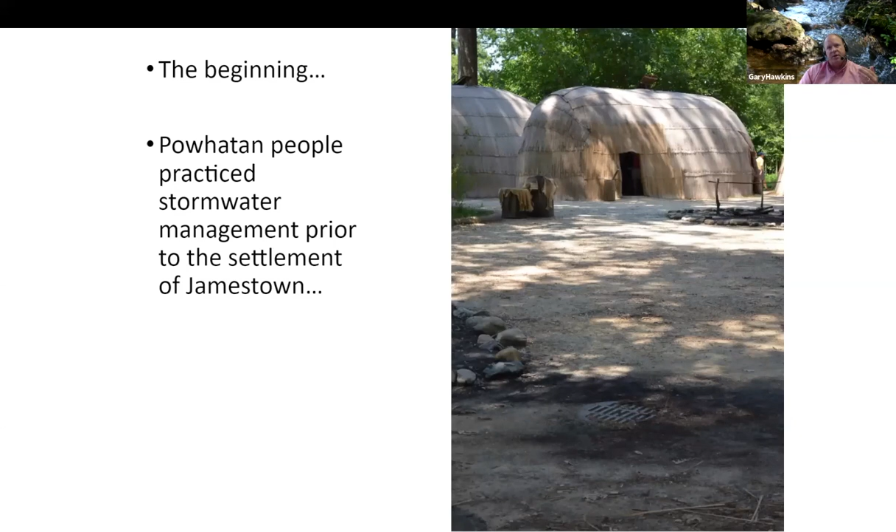So where does this stormwater exist? A couple of years ago, my family went and met some of our friends up in Virginia, and we went out to the Jamestown settlement. And as we were walking around, they have replicas of the old Native American huts and the way they cook their food and things. And I noticed the stormwater drain there. And I told my family, look here, look at the stormwater drain. They practiced this way back in the Jamestown era.

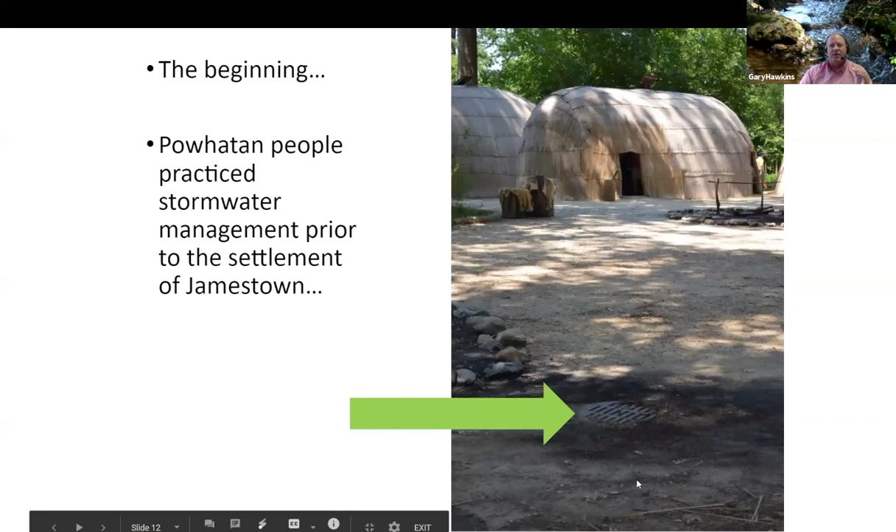And my family goes, no, you're not going to take a picture of this. But I'm just kidding, guys. This is not where stormwater started. Stormwater started a lot later than this. But it's just kind of a picture that shows even when we have water running off the land, we have to manage that stormwater.

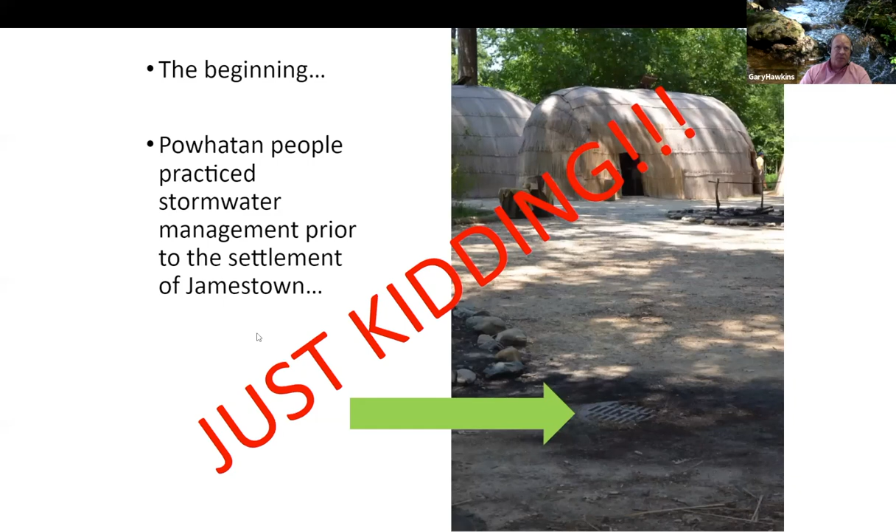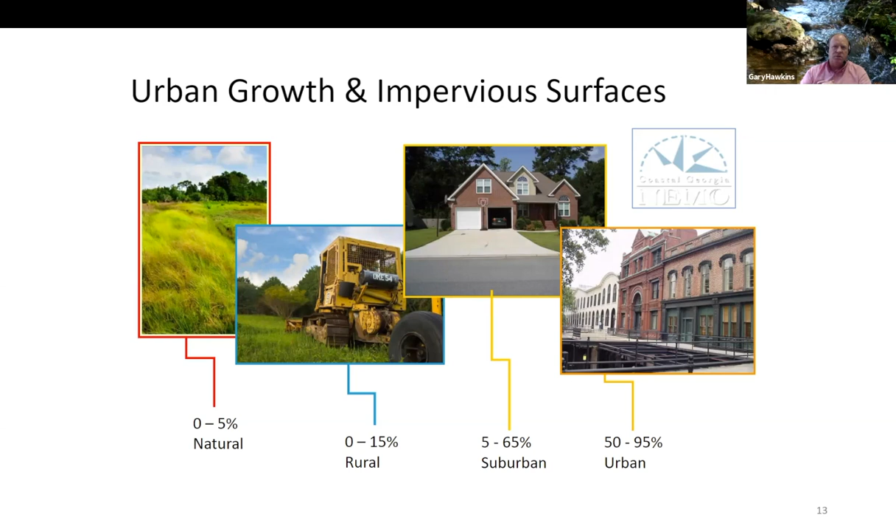When we get to a quote unquote purely urban area there on the far right, we're getting up with a lot of asphalt, a lot of concrete, a lot of buildings. And as you see, we can get upwards to 95% impervious surface.

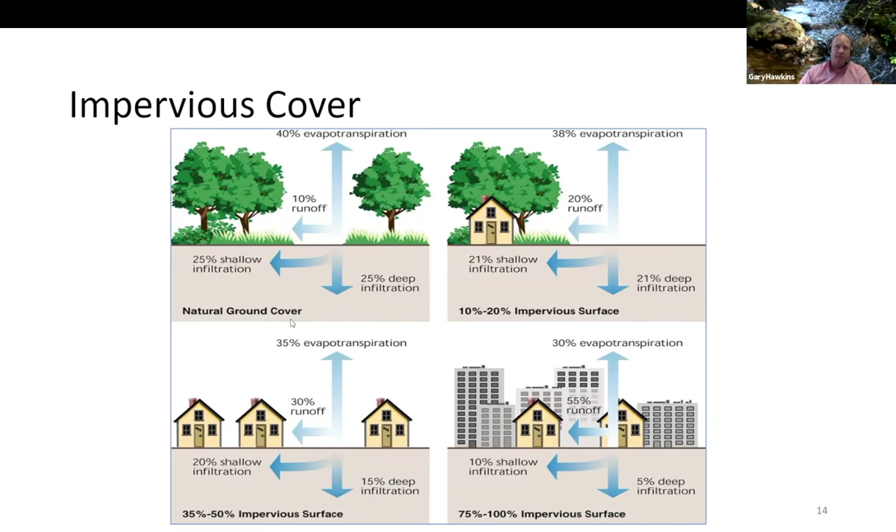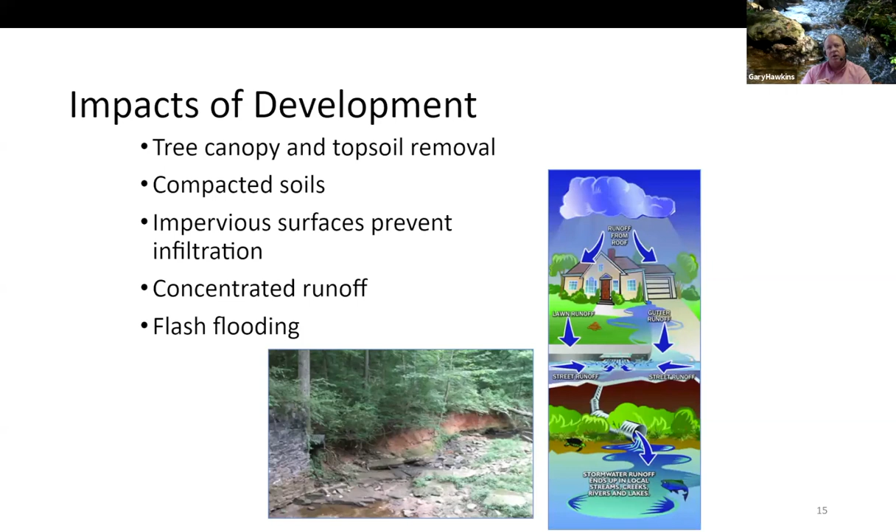If we get enough flooding, if it's been a lot of rain prior to the day that it rains, I know when I watch the news out of Atlanta, especially if it's rained for 2 or 3 days, they say there's a possibility of those flash flooding events, and that's why: the ground is saturated. The water can't go in faster than it's coming down, and it runs off. And then that picture there in the bottom middle is an indication this stream has gotten a lot of flash floods, a lot of high water coming down it, and you see the erosion occurring there.

So why then do we want to manage stormwater, and why do we want to start looking at green infrastructure? Alan mentioned it a little bit. We want to cut down on the sediment. We want to cut down on the pathogens. We want to cut down on the pollutants moving into our creeks, rivers, and streams. But one of the other things we want to do is we want to mimic that natural hydrology.

So we want as much of that water to go into the ground surface. We want it to go in so, like I said earlier, it infiltrates and it can help feed that base flow into our creeks and rivers around the Atlanta area, around the suburbs of Atlanta. It also reduces the pollutants entering those local waterways. So these are the nutrients, the fertilizer we put out, the sediment, that's the soil from construction sites, from our yards, and the other pollutants that may be out there.

I mean, how many times have you ridden down the road and seen cups and paper bags and grocery bags and things laying in the roadway? When it rains, those things go down the stormwater drain and get into the creeks and rivers. So those pollutants, some of the other things that I talk a lot about when I talk with groups is grass clippings. So if you put your grass clippings on the street side of the curb, when it rains, those grass clippings, leaves or whatnot, get into that stormwater drain as well.

When we look at green infrastructure, like I said earlier, it increases that infiltration. So we want to get water into the ground again, so we have to use less irrigation water, but also to mimic that natural hydrology of getting that water in the ground. On the previous slide, we talked about protecting creeks, streams, and rivers from flooding. So again, the less water we have run off the surface, the less we have to transmit to those creeks and river systems. And the creeks and rivers then can do their job of moving the water that's naturally there off of and away from the land surface without having this extra water from impervious surfaces.

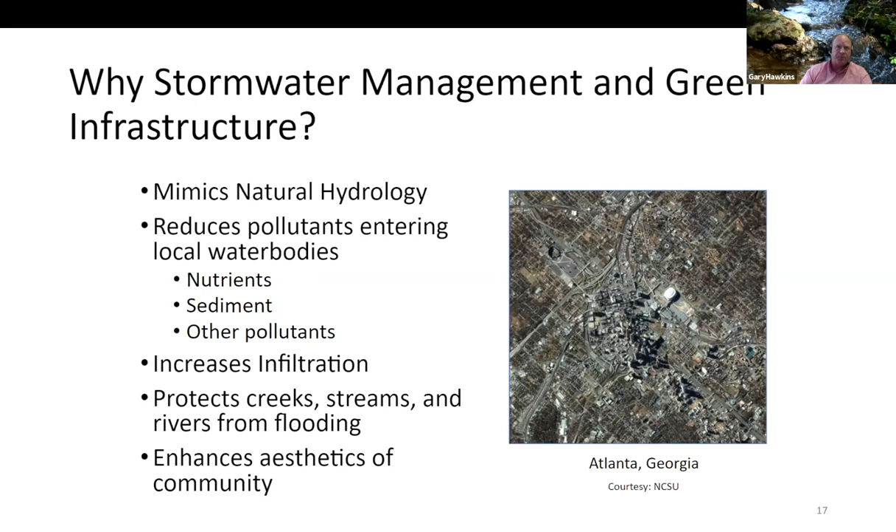And then, as you'll see with the rain gardens and some of those pictures that Martin will show and then Rolando will show in a little bit, it enhances the aesthetics of our communities. So today, Martin's going to go through, actually, 5 different practices that Katie talked about through the GCAP program. One of those will be rain gardens. So Martin will explain a lot about what rain gardens are, where we can put them, how we use them, and such as that.

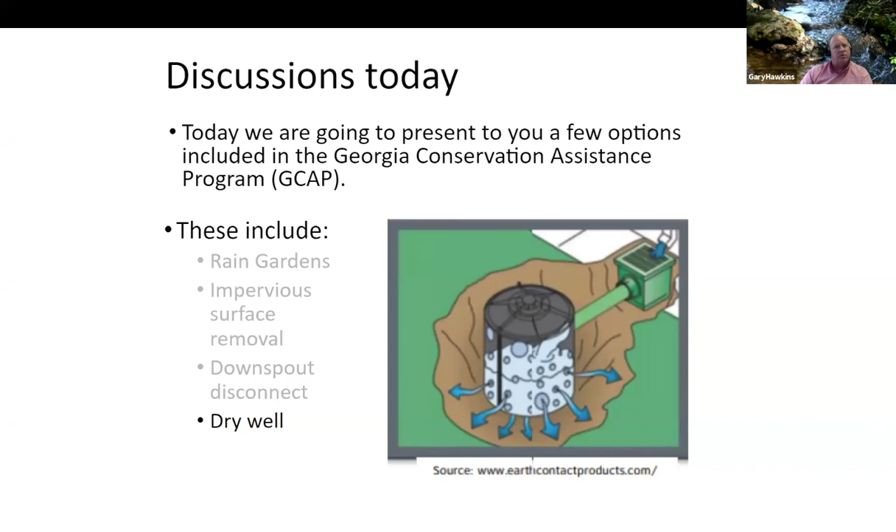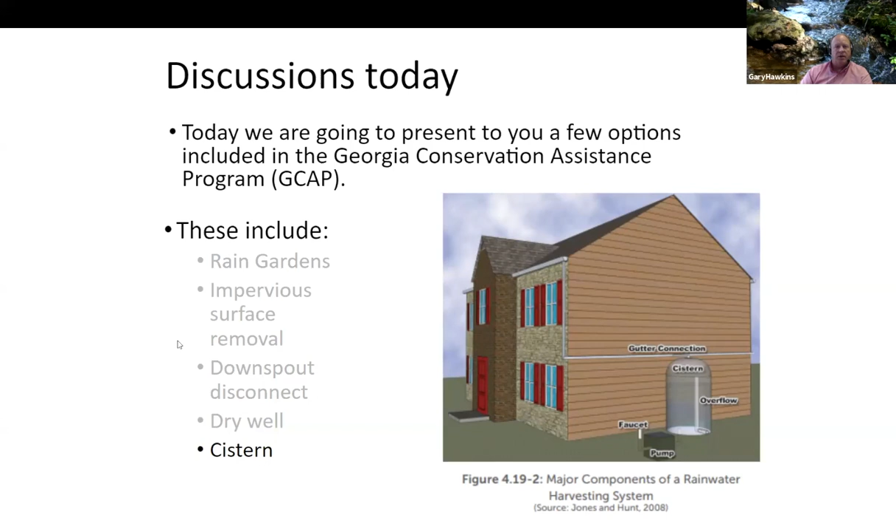Downspout disconnect, as you see in the pictures here, we remove that downspout from going into the stormwater drain and let that water move out onto the soil surface. Dry wells are another way to take care of that water. Again, it's really just getting that water into the subsurface and infiltrating it versus going into our stormwater drains. And then cisterns, rain barrels, big cisterns. And again, we'll talk about that. And then Rolando will talk about how we can use some of that water.

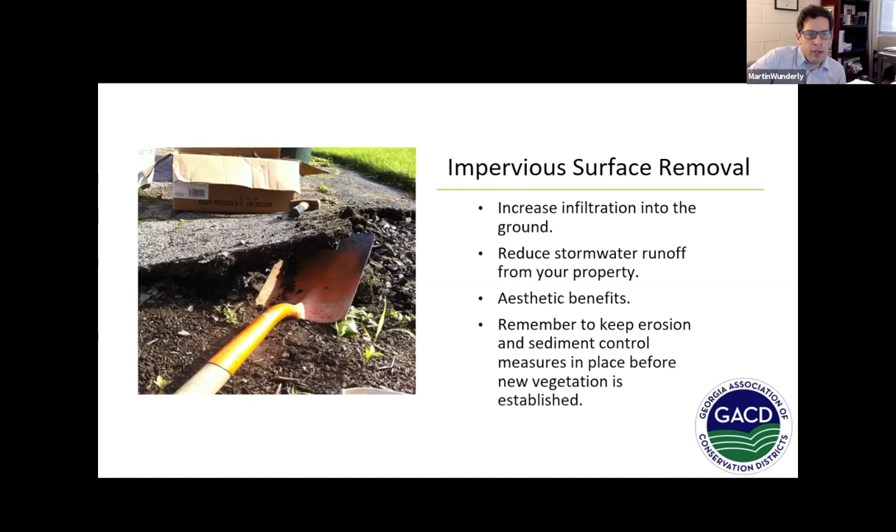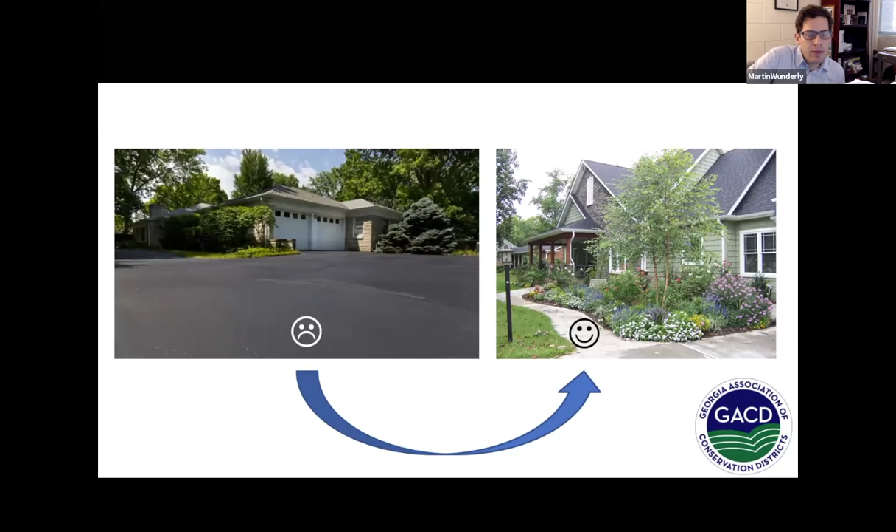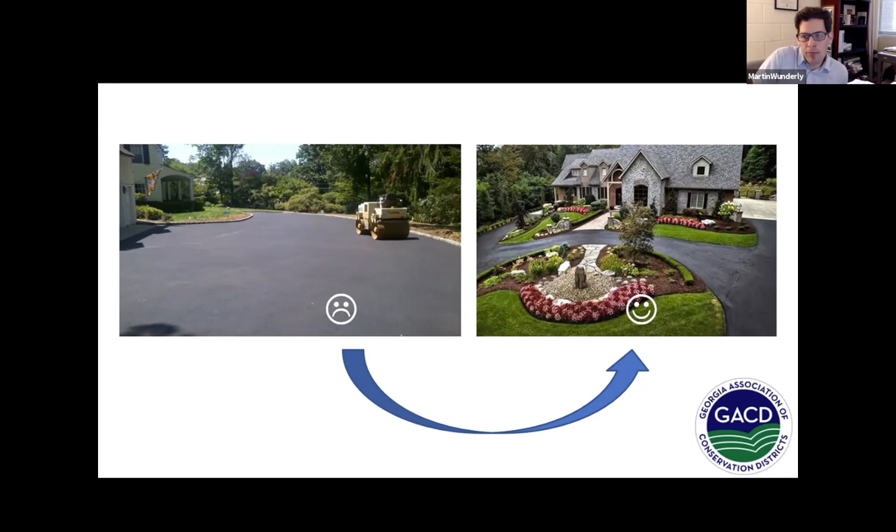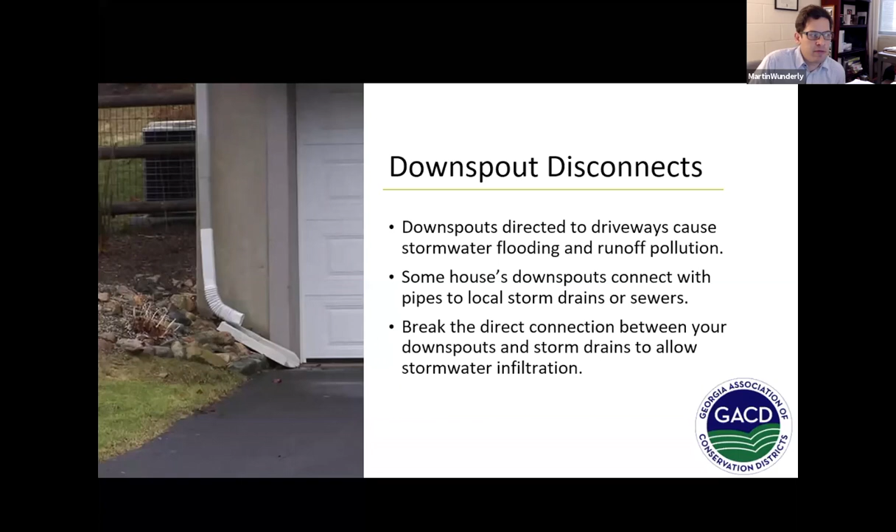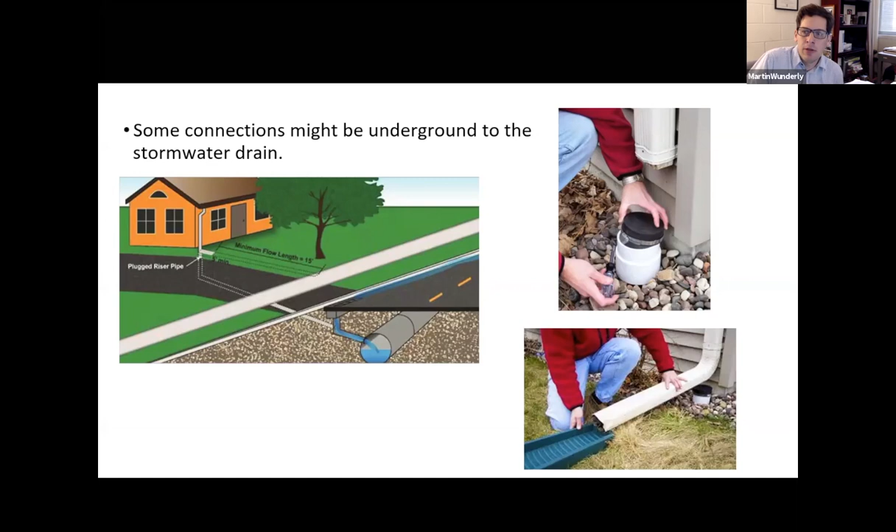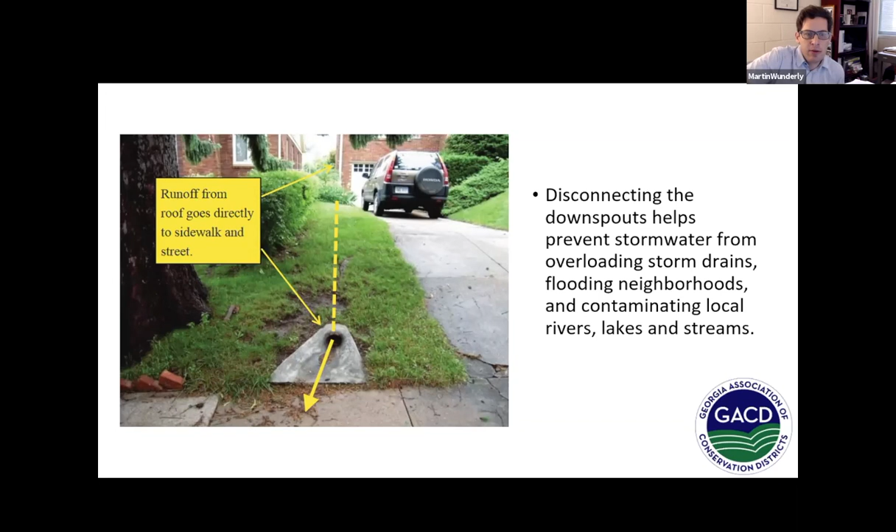This photo is another example of a downspout that is directly impacting stormwater runoff. It just opens up onto the sidewalk, traveling through a pipe under the lawn. So we want to disconnect these downspouts and help prevent stormwater from overloading our storm drains, flooding neighborhoods, and contaminating local rivers, lakes, and streams.

Now, this is where we would prefer that we send our stormwater runoff off of our roof through an extended downspout into a landscaped area for infiltration into the ground. You can also divert this stormwater into another green infrastructure practice, such as a dry well or a cistern or a rain garden. So we're connecting some of these practices.

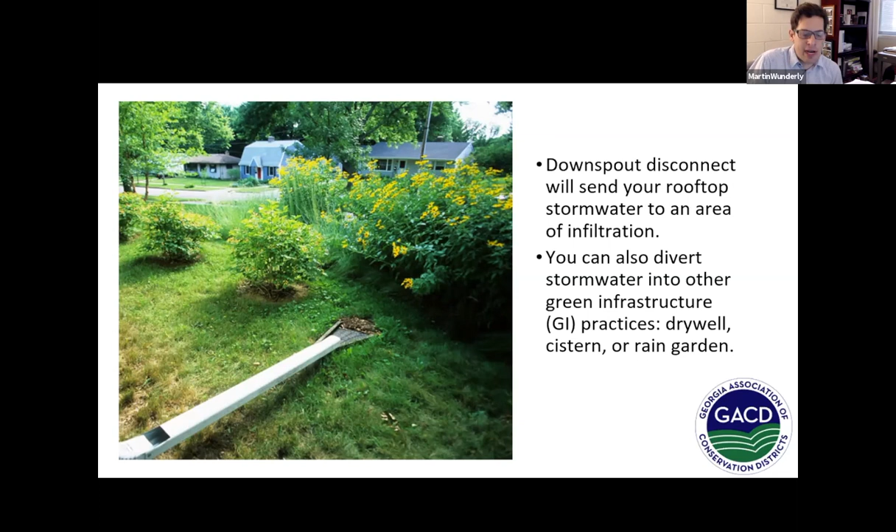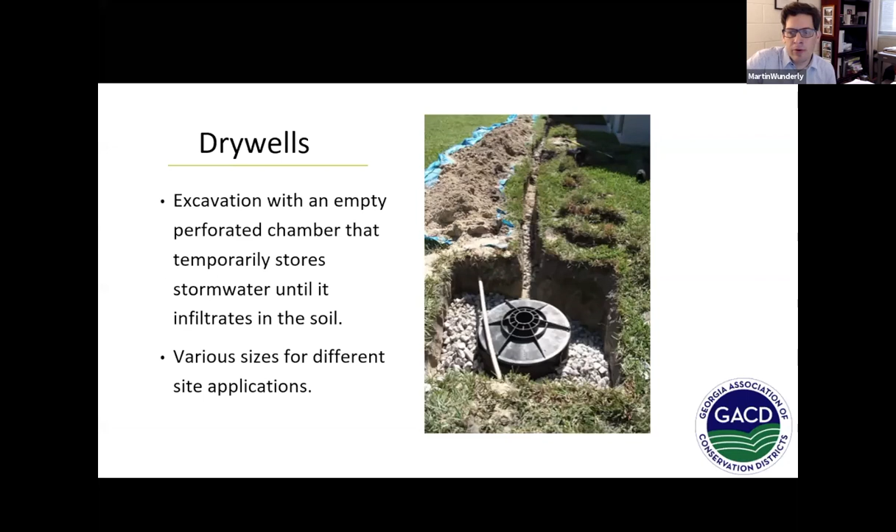Now, first of all, dry wells, they're basically an excavation in the ground with an empty perforated chamber in it that temporarily stores stormwater until it infiltrates into the soil below. You can see in this picture that final product, they'll recover that with soil and earth and landscaping. But that will be connected to probably a downspout as you go further up that little channel that was dug into the ground, with a direct connection to that dry well to collect stormwater. You can have different sizes for different applications here. And dry wells can be directly connected to your downspout.

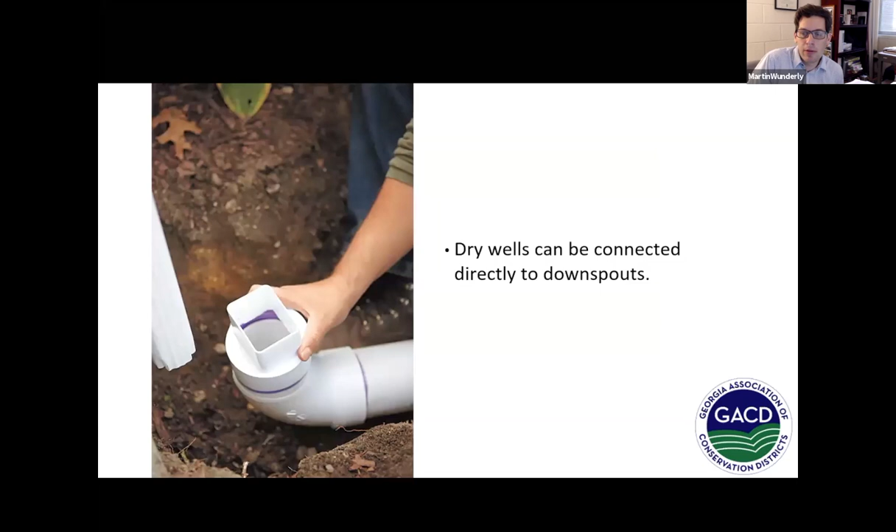You can collect runoff from parking areas as well. You can direct that into your dry well. Just remember that we do not want to put the dry well under an impervious surface in case you need to work on it. And we want that to be at least 2 feet above a water table underneath your dry well. You do not want to put these over utility lines or above a septic field.

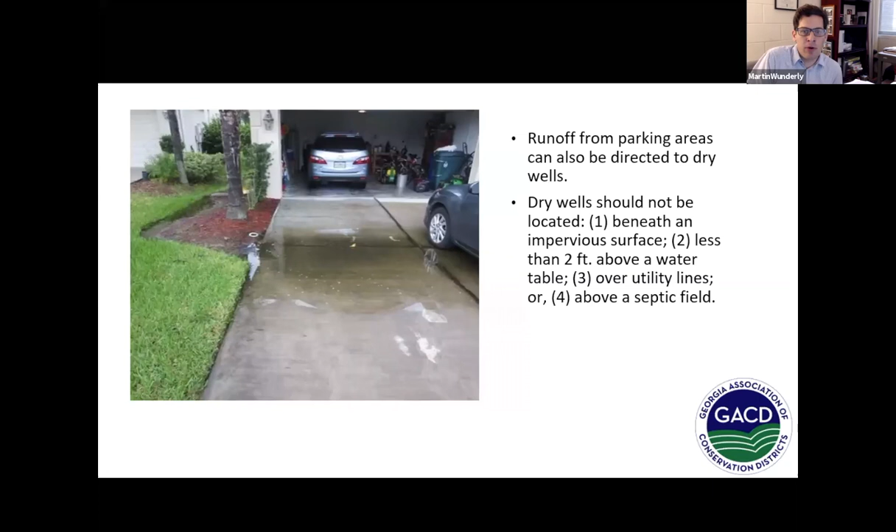But this photo shows an area that probably could use a dry well to the left in the landscaped area where it can collect this stormwater. Now, cisterns are a little bit different. They're just usually above ground, and what they're doing is harvesting rainwater for another use. Instead of infiltrating it into the ground, we're collecting it in some type of containment system.

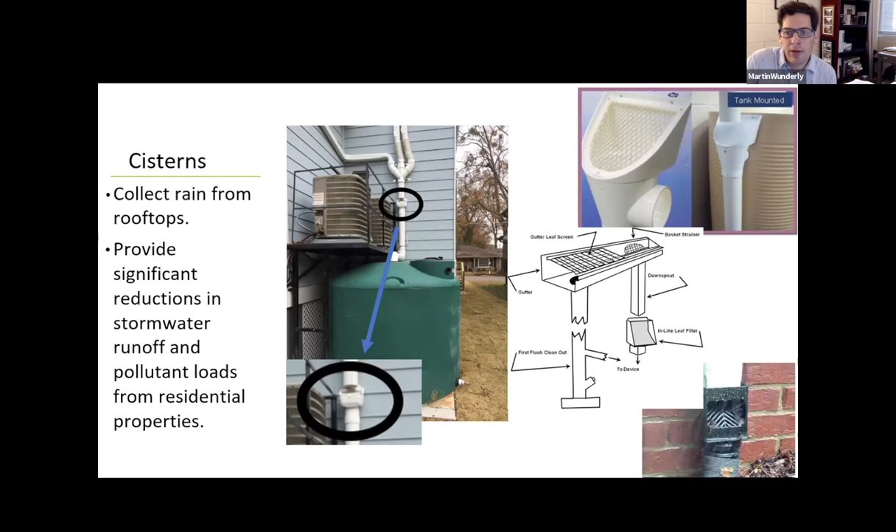You see a few screens on this slide here that are just meant to keep leaves and sticks and other debris from entering your rainwater collection cistern. And I think Dr. Hawkins will explain a few other pieces of engineering that will help prevent contaminating your rainwater source. So these cisterns can be different sizes.

and think about where you might intend to use this harvested stormwater when you choose a location, say you have a flower bed that you need to water regularly. You want to avoid utility conflicts, electrical connections. If you need to pump the water out for your irrigation, you might need to consider where your electricity supply is. And you don't want to block a window that's used for emergency exit from your building.

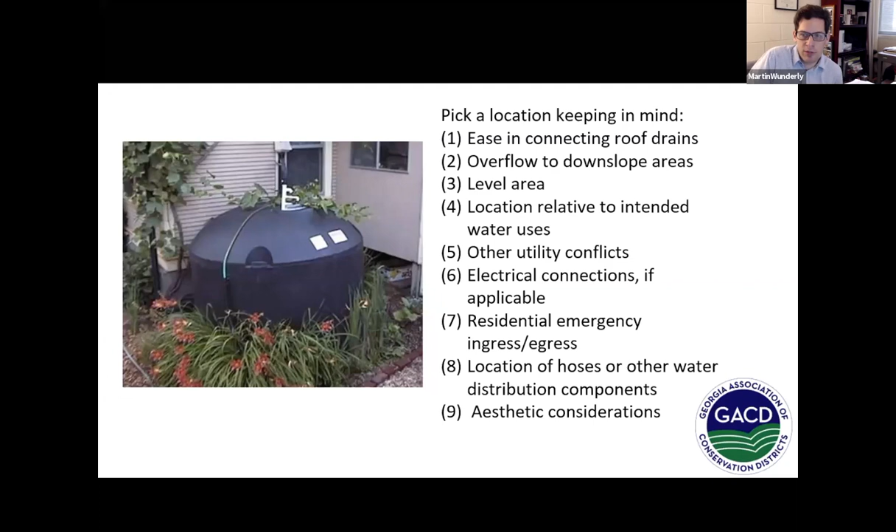And think about location of hoses and other distribution parts for your irrigation system. And think about where it just might look nice for aesthetic considerations. And I think I'm going to hand it back over to Dr. Hawkins here to talk about maintenance.

Thanks, Martin. Let's see if I can get the screen here. So Martin went through the 5 practices that the GCAP program will cover. So what I want to do is just go through a little bit of the maintenance side of it. And again, Katie mentioned earlier that GCAP doesn't pay for the maintenance, but once you get one of these practices installed, or if you have one installed, here's some of the maintenance ideas that you need to think of. Now, I'm not saying this is an extensive list, but these are some of the things that should be considered when you start looking at these practices.

Next thing is make sure you keep healthy plants in there. So the plants do a couple different things for us in rain gardens. One, they look nice. They attract the pollinators. But what they also do is they evapotranspirate. They move a lot of that water back into the atmosphere for us. So keeping a healthy plant population in there gets a lot of that water back into the atmosphere for us.

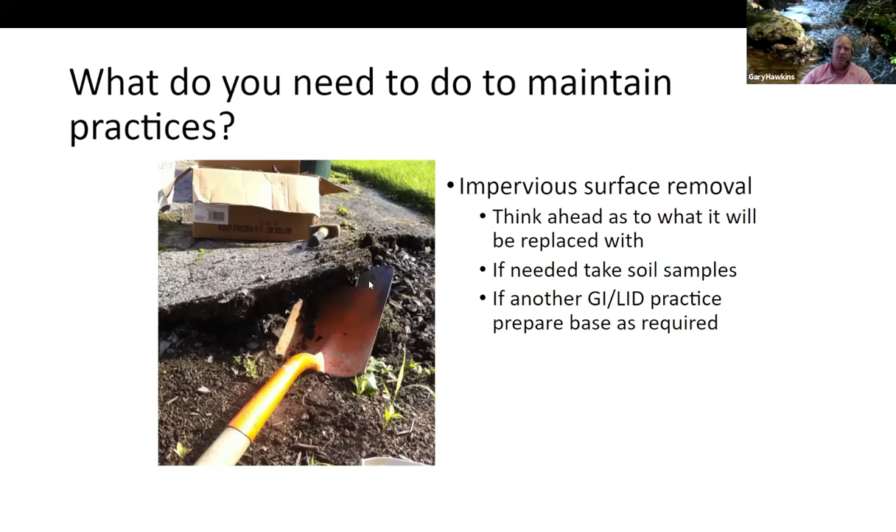When I was talking about downspout disconnects, then again, Martin mentioned how we can get that water to rain gardens or other GI LID practices, but we need to look at how do we reduce the water from flowing onto those really highly erodible spots. So if you disconnect that downspout, don't let that water go out onto a bare area. That bare area, with the velocity of the water coming through that downspout, can erode that soil away. So just kind of be mindful of where that downspout goes to.

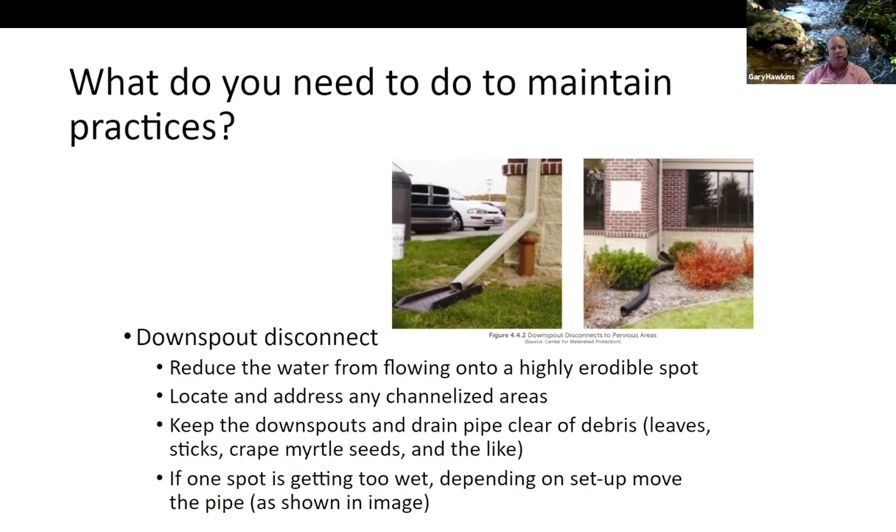One thing you need to look at and think about then too is locate and address any channelized areas. So if we start to get a lot of water coming off of the roof areas and start to see channelization, again, move that downspout if possible, but then really address those channelized areas, because if we get them before they really get deep, then we can maintain them a little bit better.

With dry wells, as Martin said, a lot of the water will go in here. And I noticed in the chat that one of the things that Corey mentioned was the dry wells receive that first inch of water. They don't really take up a lot of the bigger storms, but those things are designed to take up just a certain amount of water coming off of that roof. But if we fill up that dry well with leaf litter, with other debris, then it can't handle that volume that it's designed to do.

So keeping that leaf litter out, and I'll show a first flush diverter here in a minute. And Martin mentioned the leaf guard or the inline leaf filters. And what those things do is they keep those leaves, those crape myrtle seeds and things out of the dry well or the cistern, and let mainly just water go into those systems.

You need to watch the level in these dry wells as well. Just like the rain gardens, if we get a lot of sediment for some reason building up in the bottom, and the way these dry wells work is you get exfiltration, or you get movement of water out of these containers into the surrounding soil and the soil below it.

If we get a lot of sediment in there, it can actually blind the system, so it can't hold as much water as it was designed to. So just keep a watch on that level. Again, if we know it's supposed to move the water out in a certain amount of time, and you have one that's holding water longer than that specified amount of time, that's something we need to look at as to why it's not moving that water out. And again, keep those first flush diverters clean and maintained to keep relatively clean water going into these systems.

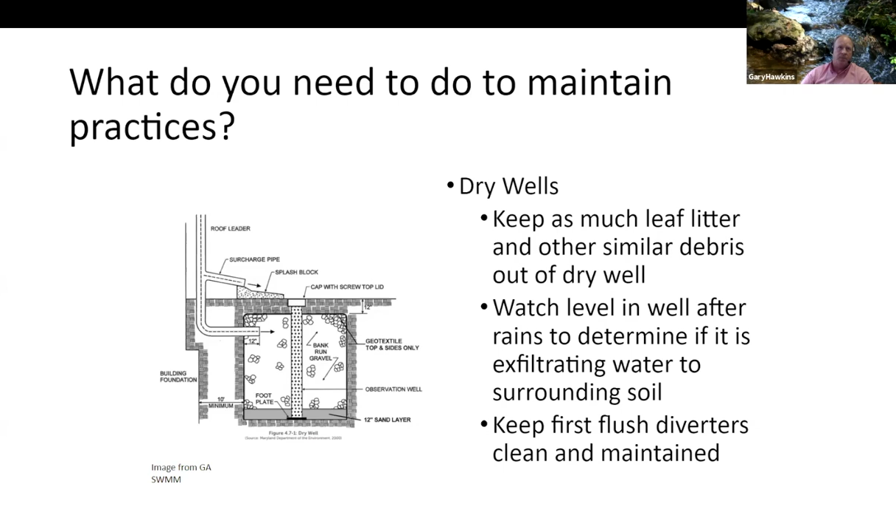Once it fills up, that floating ball will actually blind off that water, and then all the water thereafter will go into the outlet, whether that's a cistern, a rain garden, or another form of whatever. And then every once in a while, you need to drain or open that hose bib or take that clean out plug out just to get all that debris out of the system.

Martin showed a picture of the inline leaf filter, the same thing. Make sure that leaf filter is clean. The way it works is the leaf litter will go on that screen and go off and away from the house or away from the downspout where the water will go through, but just make sure it's clean and not being blinded.

With the cisterns as well, the biggest thing you need to do is look at having a dark tank. The pictures that Martin showed were a green tank and a black tank. You definitely don't want a tank where light can get into it. The lighter tanks, the translucent tanks, the clear tanks will allow algae to grow faster than a dark tank. Typically in the dark tanks, you don't have very much, if any, algae growing, which can cause problems within the tank with some of the stuff Rolando will talk about. So having a dark tank is preferable.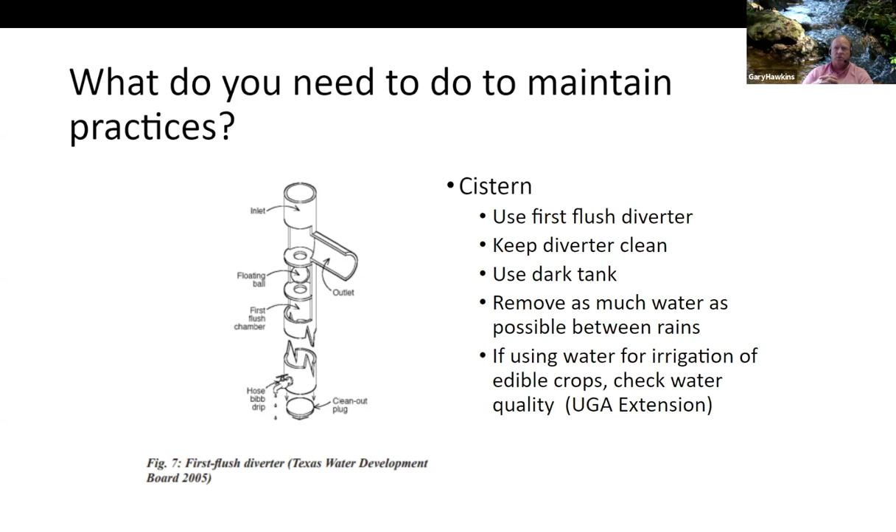Between rain events, you need to remove as much of that water as possible, because the cisterns are designed to hold a specific amount of water. If you don't get that water out between rain events, then obviously it can't hold any more water. So that's one of the big maintenance issues with cisterns, getting that water out. And if you need to use it for irrigation, make sure it's not on edible crops. If it is, you really need to check that water quality. I know Rolando is going to talk a lot more about water quality in the next couple of slides. So with that, Rolando, I'll turn it over to you.

Thank you, Gary. As Dr. Hawkins mentioned, my name is Rolando. I work for the Center for Urban Ag in Griffin, and we will talk today about alternative uses of the water that is being captured and the different cisterns and rain garden water uses.

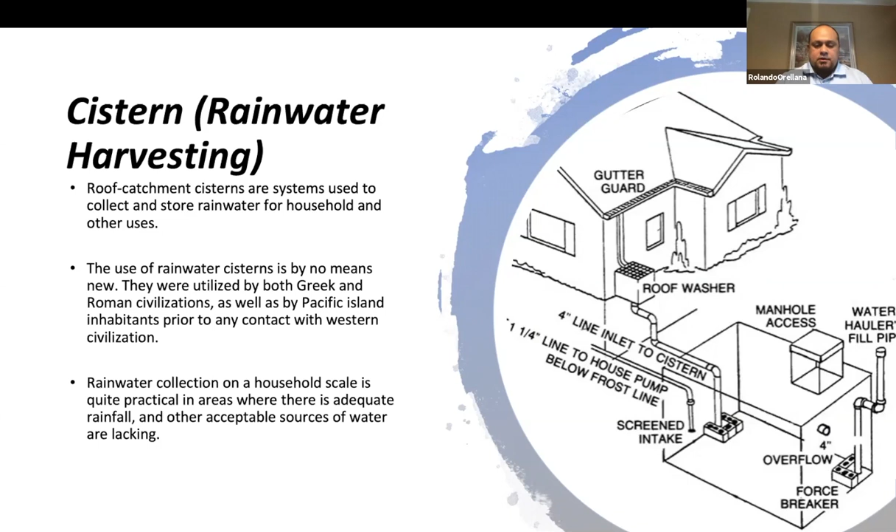It is very practical in areas where we have a good precipitation average. In some areas, it's probably not very practical because they don't have a good average. But locally here in Cobb County and Fulton County, there is a distribution supply, and it's very efficient, and it is available to residents of the two counties.

And in the state of Georgia, the water in Atlanta, the metro city, is considered one of the most expensive waters there is in the state. So Cobb County is a little more affordable, but it's still somewhat expensive, if that serves as some kind of joke.

But so what is the use that we're going to use? We have already these systems, and if you guys were working with the GCAP program to make some improvements, if some of those improvements will be to install cisterns or these water tanks to capture that water, there are a few uses you can have. Obviously, it has to be a non-potable usage for irrigation and other uses that

aren't intended for human consumption. Obviously, those large tanks, we have to know how big they are, how much water those tanks will hold, where are they located, and then so it can be utilized either for lawn, ornamentals and tree irrigation, or even raised beds for gardens use, etc.

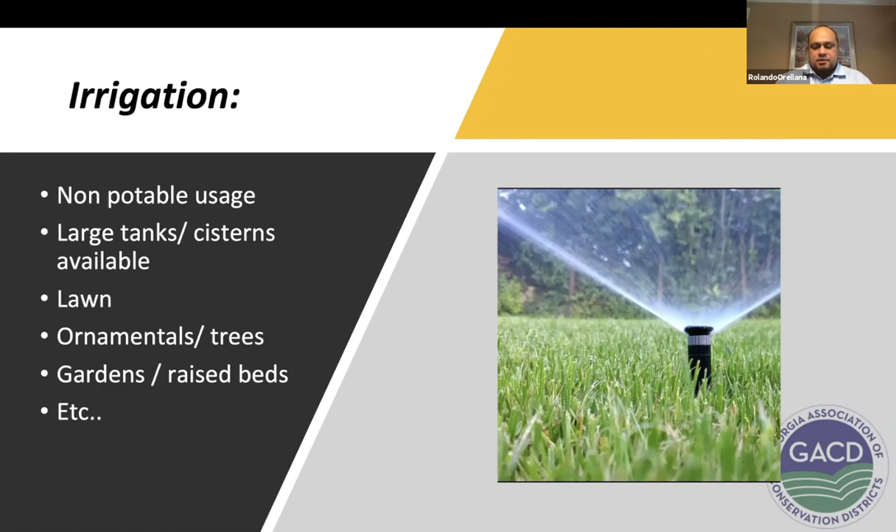This got stuck here. So one of the things that we need to understand, the tank needs to be located in the area where we're going to be using it. It has to have enough capacity so it can hold enough water to water the area or the plants or the trees or the raised bed that we're gonna be watering.

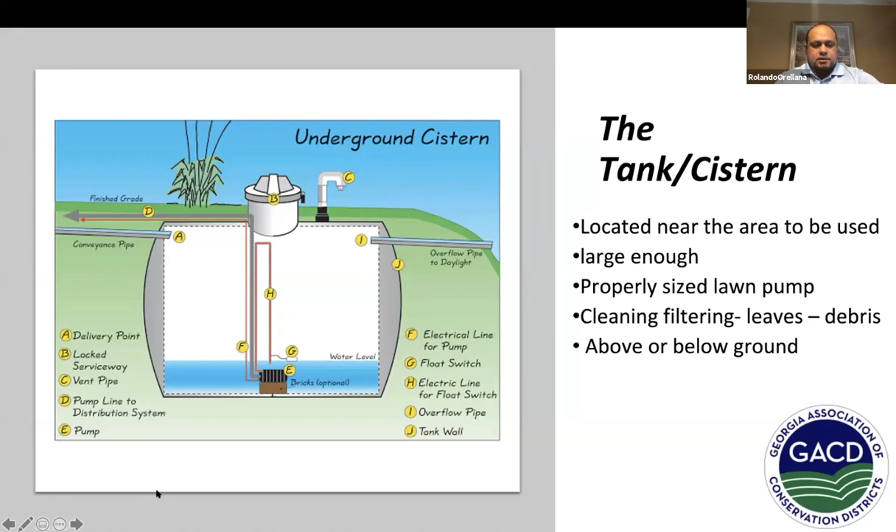Obviously, you need to have a pump that will be capable of providing the pressures needed for the irrigation system that you plan to implement in the area. Obviously, those pumps have cleaning, filtering of leaves and debris before that water can be utilized, because otherwise it might not give you the pressure that you need.

Obviously, if we have one of those tanks, we need to understand how much lawn we are intending to irrigate. Most lawns, or the average lawns, I will say, go from 1,000 square feet to 3,000 in the front yard, and even more in backyards. So you will need a lot of water for that. So you probably need to decide what area you want to be watering. So probably you start with a good measure, 1,000, 2,000, 3,000 square feet.

Obviously, the lawn or the type of grass you're going to be using has specific water requirements. We have so many different types of grasses available right now. So even though some of them might look similar on the water requirements, some types of grasses require less water, and that will be very helpful for the system you want to install for water conservation purposes.

Obviously, the type of soil we have here in Georgia, very much red clay, which is bad for water infiltration. And the terrain, how many slopes you have, that's going to cause a lot of water runoff. So those are the things that we need to consider when we will be installing or utilizing this water. Amendments, that includes maybe incorporation of some organic matter, can be done before we start using this type of system, so we can have some water conservation.

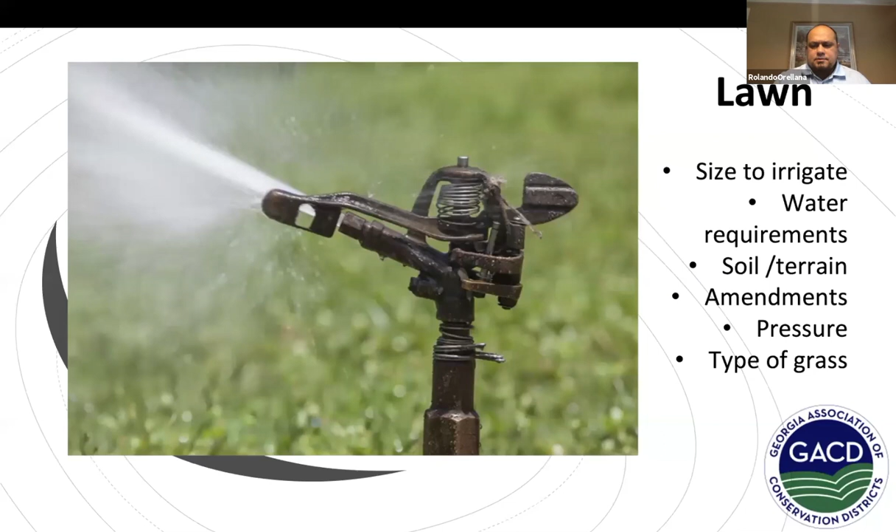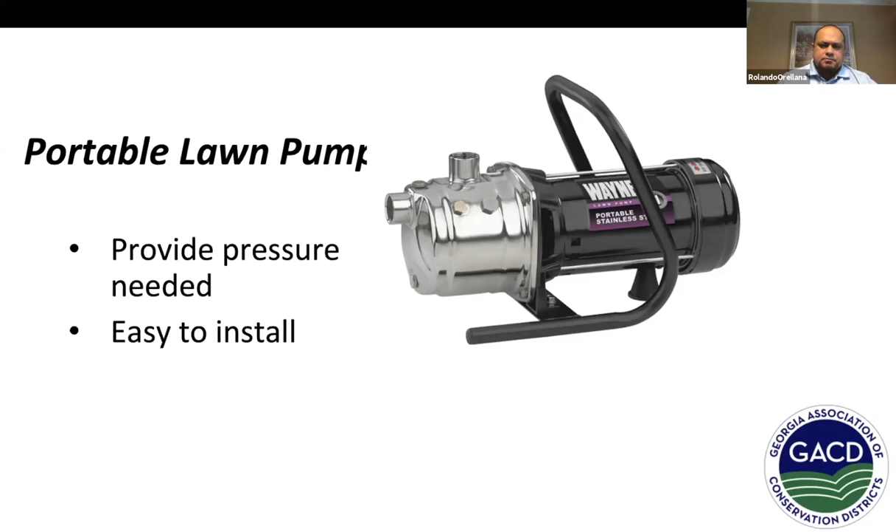Just quickly, I wanted to talk a little bit about the grass that a UGA engineer released a few years ago. I don't know if you've been familiar with this, but this is TifTuf. TifTuf has been tested in around 19 drought stress trials to sport fields.

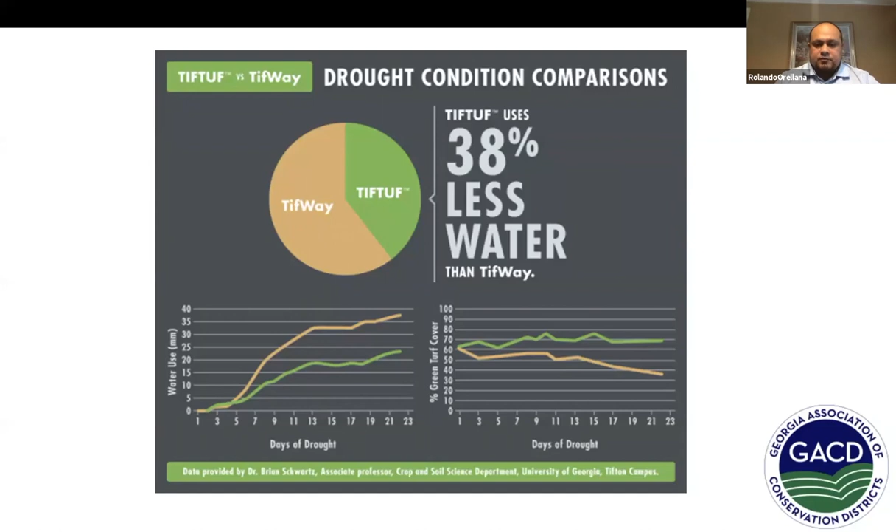So different universities tried these things, and they found out that it saves around 38% of water compared with Tifway. So I think this is a good option for somebody who wants to be implementing. So, 38% less water compared to Tifway. So this is a pretty good option for somebody who wants to implement some of these practices.

When we're talking about irrigation on trees and ornamentals, obviously we're not going to be using the sprinkler systems. We're going to be using the drip system, which doesn't need a lot of pressure, and obviously will need some type of maintenance. The initial cost of this is going to depend on how much or what quality you want to add to the system, but it will definitely cost some initially.

It is most effective because you're going to be delivering the water where it is needed. Obviously, you want to be minimizing the loss of water by evapotranspiration, which is one of the problems that we have, and obviously by runoff. Mulch provides this layer so you can conserve some moisture and not lose some of that water by ET.

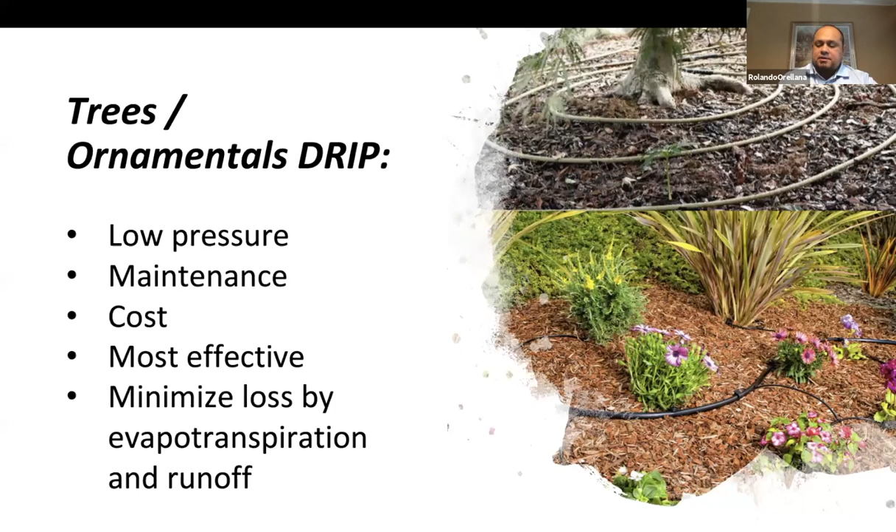But drip irrigation systems will be very ideal for trees, especially for trees that need to be established within the first 90 to 150 days. It is critical to have the water that they need to be able to establish. Same thing with ornamentals. That's one of the critical parts. Most of those plants die in the first stages of their establishment because they have lack of water or excessive water.

Use of this water on raised beds or gardens. This is very important to consider: this water quality needs to be tested to be able to use it on raised beds for vegetables and for human consumption. So one of the things that you need to do is reach out to your local extension agents to help you decide what type of testing you will do at the UGA water lab.

And these are some of the publications you can get at the College of Agricultural and Environmental Sciences website. There's a number of publications. There's hundreds of publications over there. And one of the faculty available over there will be Uttam Saha and some others that will be able to help you. Obviously, to get to them, you need to be contacting your local extension office.

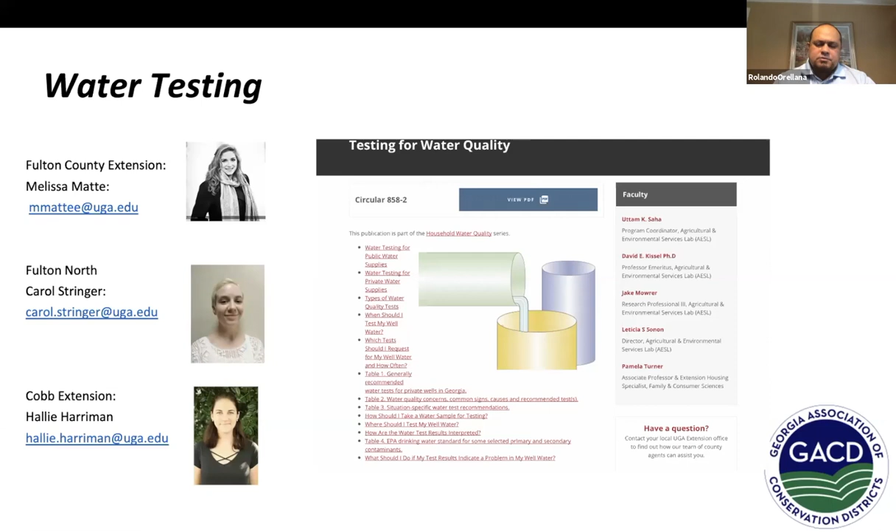You can see Melissa Matte in Fulton County South. North Fulton will be Carol Stringer, and Hallie Harriman in Cobb County. So they will be your local point of contact, so you can get access to this water testing. And they will explain more to you about the gardening part and also the water testing.

Just to talk a little bit about rain gardens, obviously all the plants that will be planted in some of these rain gardens will need water to establish. We need to get them established and make sure we have enough water. Sometimes these plants will need some water when there's deficits or drought, depending on the year. Now weather is so unpredictable; sometimes we get so much water, and sometimes we have some deficit. So it varies very often.

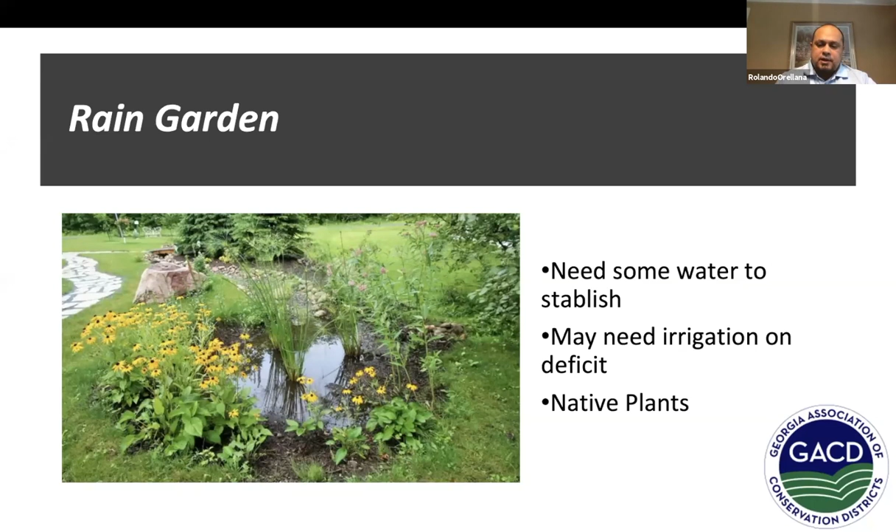Obviously, native plants most of the time will be very tough on drought resistance, but most of the time native plants also need to be good on flood or too much water tolerance, because a lot of those rain gardens get water standing around waiting for the infiltration. So they might need to be plants that will be tolerant to that.

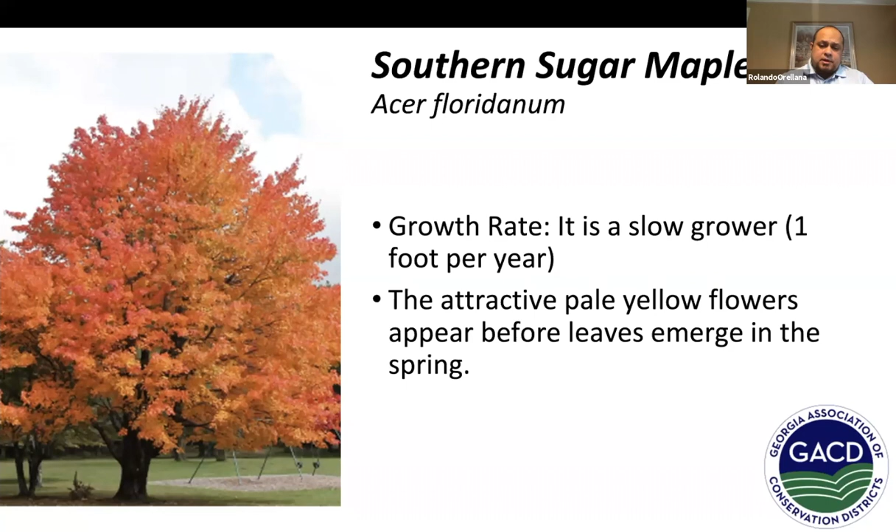Just a quick overview of some of the plants that might be available for this type of rain garden. I wanted to put this tree over there. Trees are very beautiful, with different, good colors, and they enhance the view of the landscape, yards and residential areas. So this is the Southern Sugar Maple. It is available and is recommended according to the City of Atlanta list that you will find in the GCAP manual. It's very attractive. You can see how beautiful it looks. So it might be a good option.

Then you have the Southern Wax Myrtle. It's a tough, fast-growing evergreen. This shrub is covered in beautiful dusty blue berries in the autumn. It tolerates a variety of soils from sand to clay. It grows in areas with low fertility. So that will be a good quality you might need.

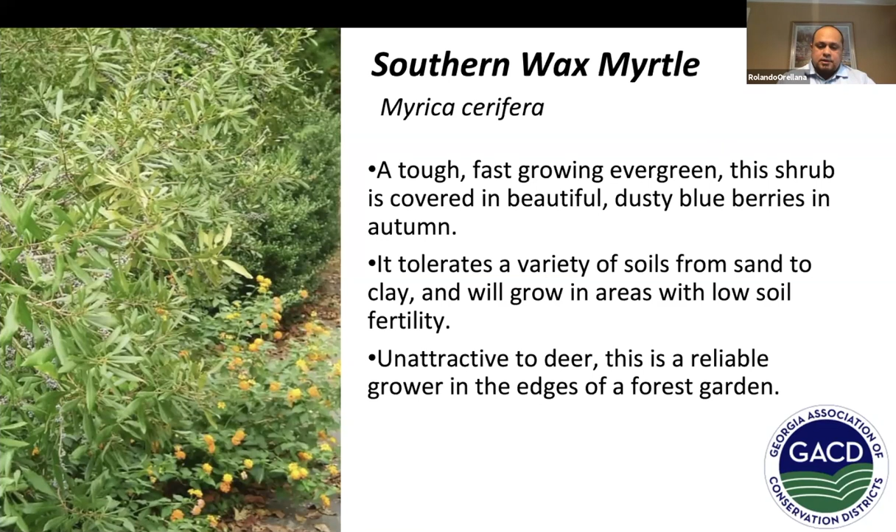It is unattractive to deer. I know in some parts of Fulton County and Cobb County, that is a good quality that is very desirable. Monkey grass is very used in the landscape in the metro area.

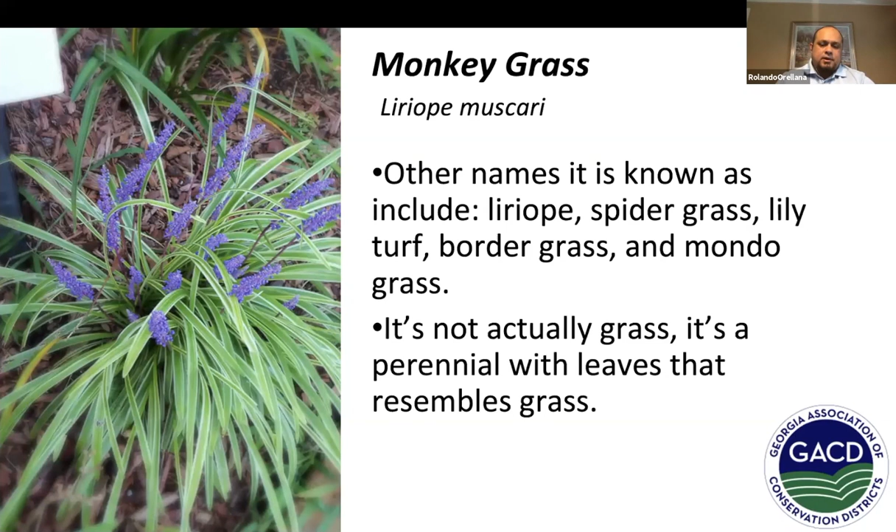Other names include liriope, spidergrass, lily turf, bordergrass, and mondograss. It's not an actual grass; it's a perennial with leaves that resemble grass. That's one of the things that you can see. It has some nice color, different colors at this time. In this case, you can see this purple, beautiful color.

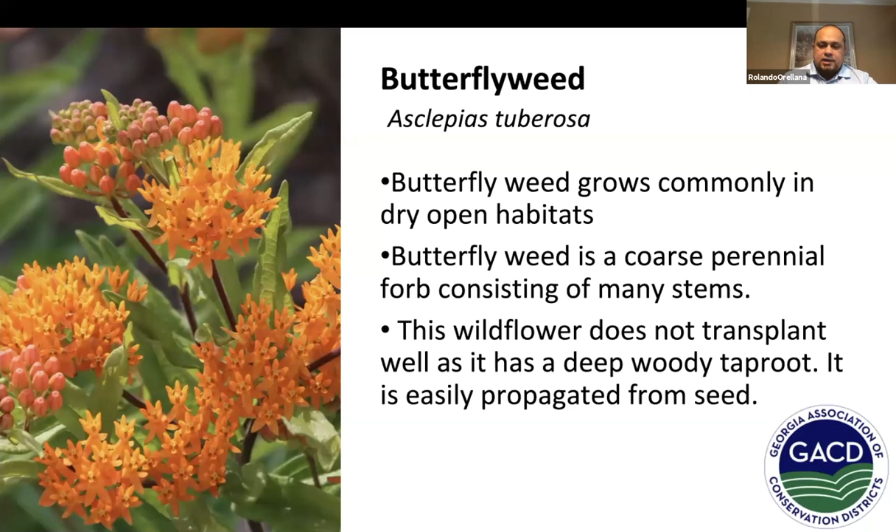And then we have the butterfly weed, which normally grows in dry habitats. It is a perennial. The wildflower does not transplant, since it has a deep woody taproot. It's easily propagated from seeds. So you can get some seeds, and you can easily establish nice plants of butterfly weed. Then you have the ferns.

The American Royal fern typically grows in clumps 2-3 feet tall. So it can get really big, up to 6 feet high when it has a lot of water or moisture available. And it's a good selection for wet areas like ponds, streams, rivers, and gardens, etc.

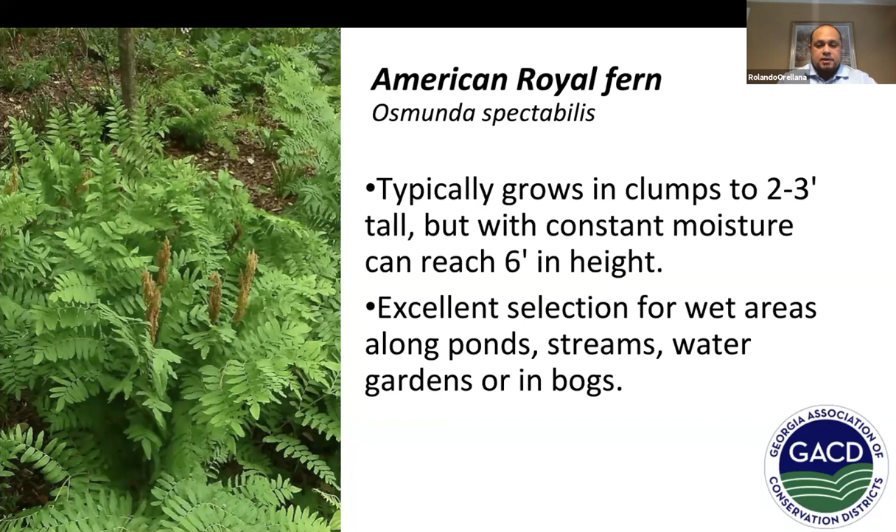So this is all I have for today. I want to turn it back over to Katie, so she's going to talk specifically about the applications and timelines of the program. Thank you. Thank you, Rolando.

Okay, so this is Katie, and I just want to thank Rolando, Dr. Hawkins, and Martin for their wonderful and informative presentation. Hopefully, if you don't decide to apply for GCAP, or if you don't receive the funding, you will maybe implement some of these practices on your own property in the future. So now I am just going to review the GCAP application and timeline period for funding.

So the application period opens today, and it will go through the end of this month, and the online application is available at our website, www.gacd.us/GCAP, and we also have a printable version available online as well that you can print off, complete and mail in or email in to us.

And as we've discussed today, the best management practices eligible for funding are rain gardens, cisterns, dry wells, downspout disconnects, and impervious surface removal. So the funding is for the installation of these practices only. We will not be providing any funding for the maintenance of the practices. So that will be the responsibility of the homeowner.